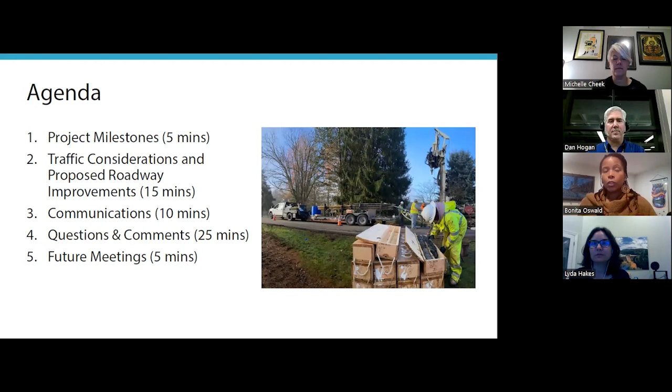Thanks, Bonita. Good evening, everyone, and Happy New Year. I think we could still say that for a couple more days anyways. I'll kick off tonight's meeting with some quick updates on the filtration project progress, and then turn it over to Dan and Lyda, and then back to Bonita.

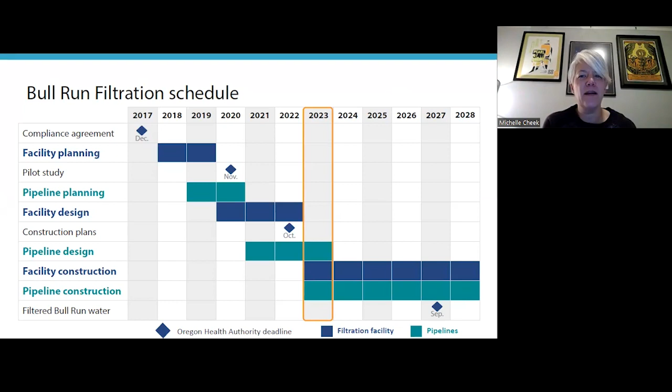Here we are in a new year, now a little less than 5 years away from our September 2027 deadline to deliver filtered Bull Run water.

2022 was an important year for the project and meeting some important milestones. In September of 2022, we submitted our land use application to Multnomah County and are working on the next steps with the county. I'll share further updates on the next slide.

In October of 2022, we submitted the filtration facility construction plans to the Oregon Health Authority, meeting our regulatory deadline to submit construction plans. We're now working on final design details, preparing the 100% design deliverable for the filtration facility and the 90% design deliverable for the pipelines portion of the project. Later this month, we'll be submitting our land use application to Clackamas County for the portions of the project located there.

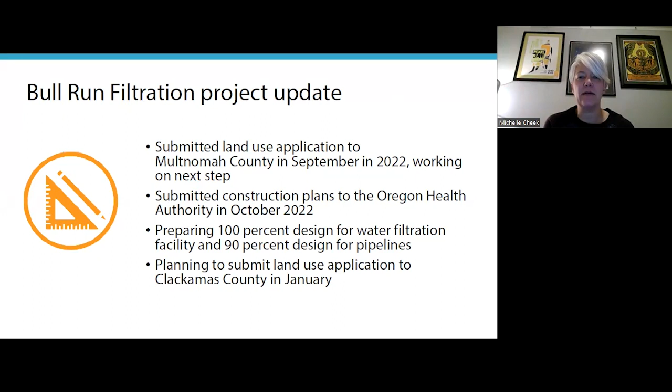As mentioned, we submitted our land use application to Multnomah County in September of 2022. The county deemed our initial application incomplete, which just means they need some additional information on a few topics. Our project team is preparing this additional information, and we're hoping to achieve completeness in February. Once the county deems the application complete, there will be a 150-day application review period.

Now that we're approaching the end of the design phase, we're doing more planning for facility construction. We're working with the contractor to develop an overall schedule and sequencing of work, with a planned construction start date of September of this year for the facility, and spring of 2024 for the pipelines.

Part of the construction planning includes identifying construction safety measures and other best practices to limit disruption to our site neighbors and surrounding community. Bonita will also be leading ongoing communication and outreach to our site neighbors and local businesses, which she'll talk about later in the presentation. We'll also be getting the contractors for the facility and the pipelines out to meet with our neighbors and surrounding community as we lead up to and during construction.

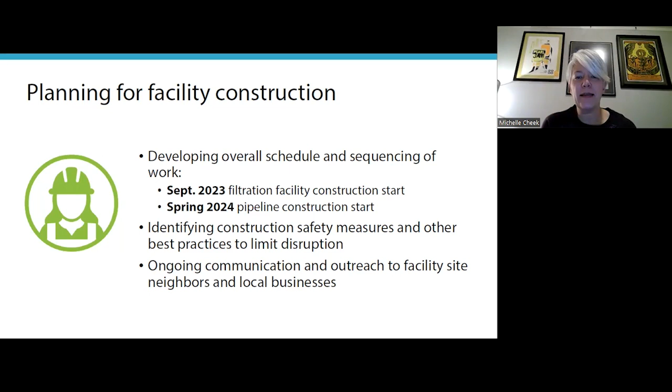And with that, I will turn it over to Dan to talk about some of the construction traffic considerations. Thanks, Michelle.

So this project has both pipelines and a filtration facility being constructed. The facility is near our existing pipelines, but not quite exactly in the right location. On the slide here, you can see the green line - that will be our unfiltered water going into the plant. The blue lines going out to the north and west are the filtered water.

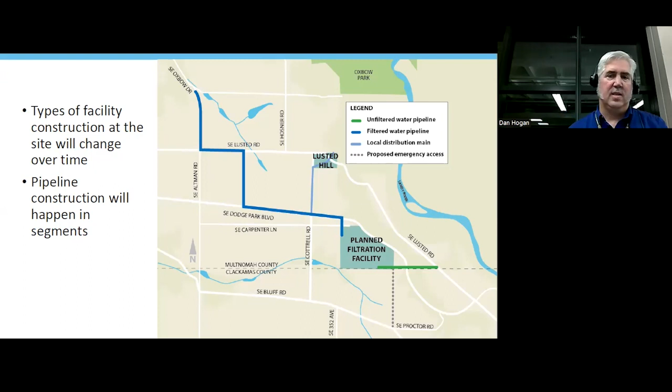Construction of the pipelines, as Michelle stated, will start in spring of '24 and goes through 2027. We're going to be working on a lot of roads, but the work will not be all simultaneous - it'll be more of a linear construction. This is kind of all our locations that we're working, which you can see here.

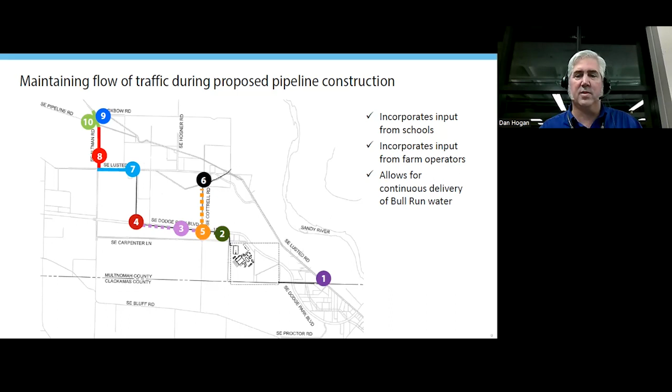When we are laying out our construction plan, we're going to try to maintain the flow of traffic as best as we can. We've been meeting with schools in the area and incorporated input from them. We've been talking with the farmers out there, all the nurseries, and we're going to put a lot of constraints on the project that won't allow the contractor to work in multiple locations at the same time. All this is going to occur while we still deliver Bull Run water to the city of Portland and all its wholesale customers.

That slide was a little busy, so we broke it down. At location 1, on Lusted Road near where Dodge Park meets, this is where we're meeting our existing 3 pipelines and entering some private property, then going up the hill to our facility. This is going to require intermittent road closures at this location that could be on the order of a few months at a time, occurring throughout the whole project.

The constraints we put on the contractor here are to make sure emergency vehicles and such can still get through, and to have traffic open at nighttime.

Locations 2, 3, and 4 are on Dodge Park Boulevard. This is our finished water pipe now as it comes out of the facility. We'll have single lane traffic in Dodge Park. The reason 2 and 3 are separated is the constraints vary a bit based on the nursery operations that'll be going on. Location 4 is where we leave Dodge Park into a farm field.

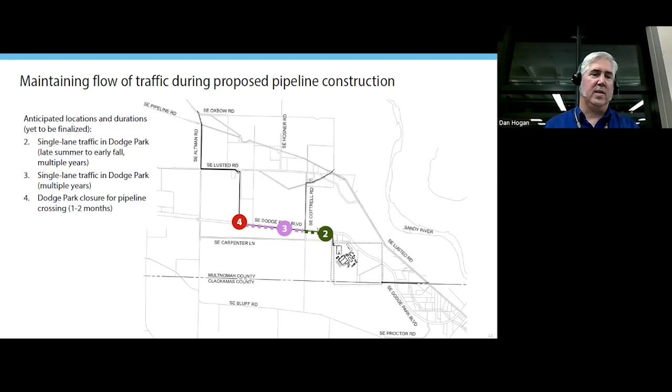At that location, we do need to cross Dodge Park, and there will be a semi-short closure of 1 to 2 months there, timed around farm operations.

This project requires us to connect back to what we call the Lusted Road distribution main that's down below on Lusted Road. So we're going to do that along Cottrell Road. Most of the work here is a trenchless installation, though there is some open cut, meaning we won't necessarily be digging up the road the whole way, but there will still be a lane taken, and we'll have single lane traffic while that work's going on.

Locations 7, 8, and 9 come out of what we call our finished water intertie. That's where the two new pipes coming out of the facility join up with the existing conduits along Lusted Road, which is very narrow, requiring a road closure there. This will occur in 2 different instances, one in the middle of the project and the other at the very end. Lusted currently has one of the conduits in it that we're tying into.

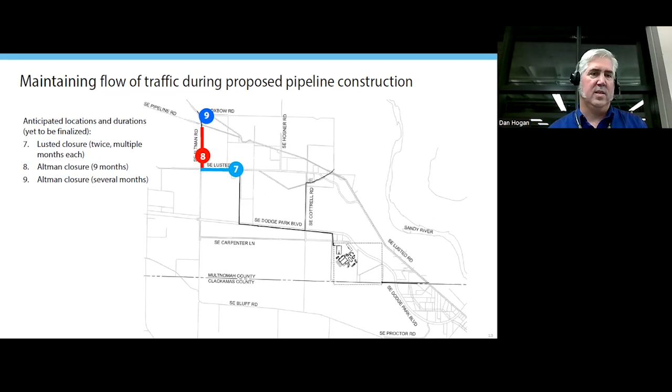On location 8, going up Altman Road, we're going up to meet the other 2 conduits at Pipeline and Oxbow. The reason 8 and 9 are separated is so traffic from Pipeline can either get to the north or the south depending on what part we're constructing. So 8 and 9 will not be at the same time.

At Pipeline Road, because it is a bit narrow, we do have to close that road down to tie into an existing conduit. Right now we're aiming at the summer for that one, to make sure school buses can get through in the school year.

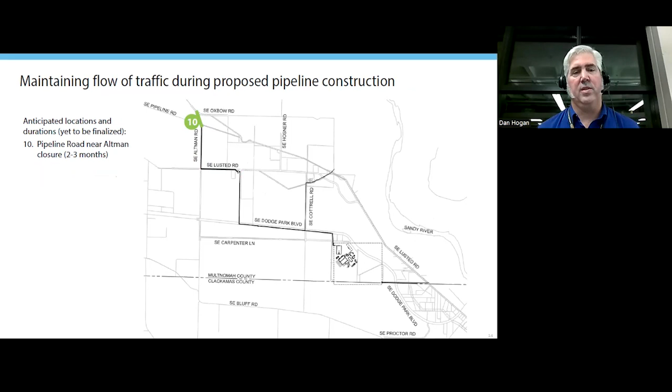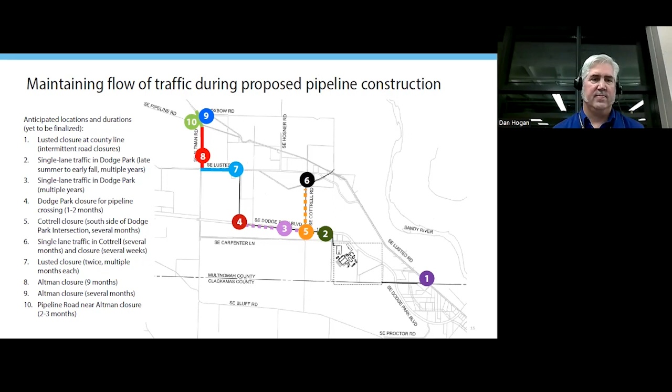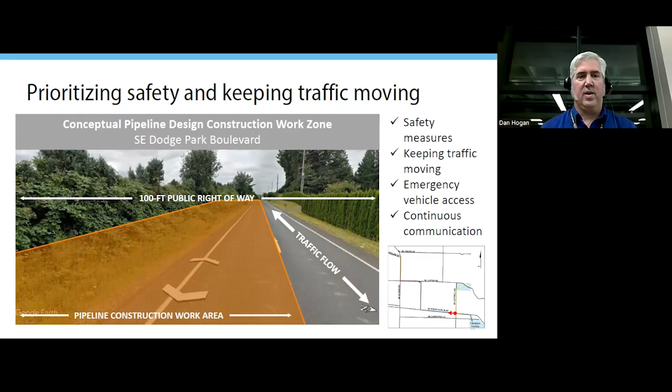We're going to prioritize safety and keeping traffic moving as we're doing this. This is a conceptual figure of work that would be going on Dodge Park Boulevard, which has a 100-foot right of way. On Dodge Park, we will always have one lane open to traffic, which will require flagging. We're taking into account safety measures, keeping traffic moving. Emergency access will be maintained throughout all the locations, and we're going to use continuous communication with the public to make sure things are safe.

This is an example of a work zone with traffic control measures. As 2 lanes come up to the work zone, it would go down to 1 lane as it goes through the work zone, then out the other side, with traffic going the other direction.

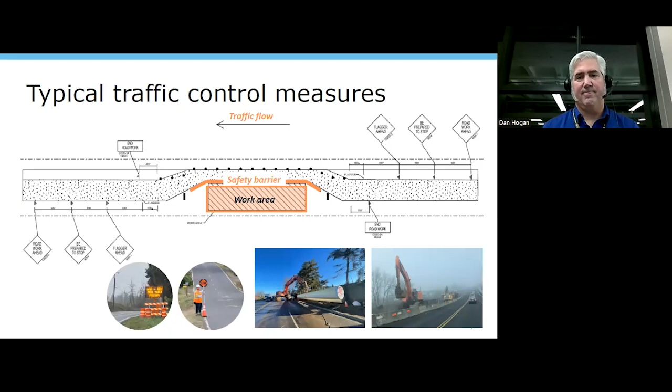One of our biggest focuses, and our contractors as well, is just to make sure that we have a safe and well-managed work zone. There'll be flagging at all times, with closures or single lane traffic. There'll be temporary offsite signage for traffic routes, and notifications sent out. We'll be using street sweeping and on-site dust control, posting safety signs. The equipment will be operated safely, and the contractor will exercise daily cleanups to make sure the site's safe at nighttime.

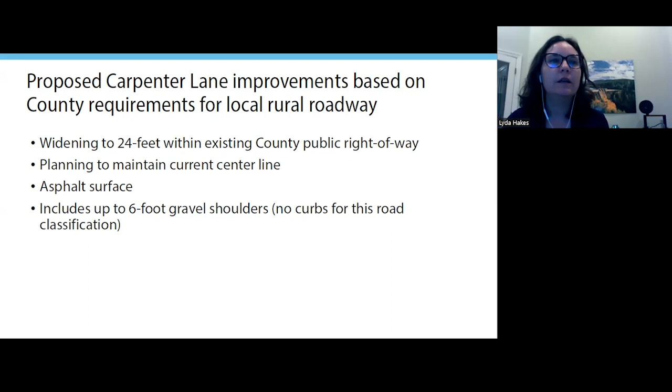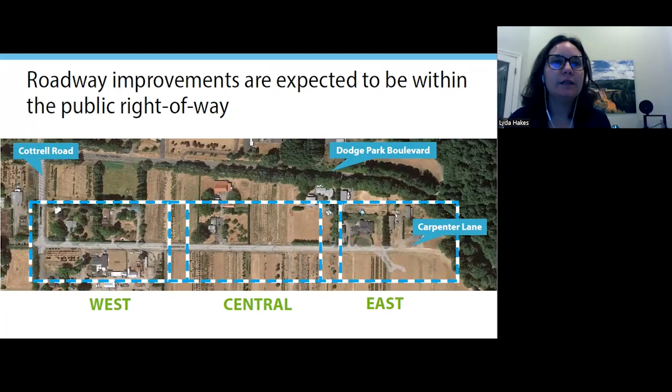The roadway improvements are expected to be within the public right-of-way. Here we've taken a Google Earth satellite image and overlaid our design onto it. To orient you, you have Dodge Park at the top, Cottrell Road on the left side of the screen, and then Carpenter Lane. We have it broken into 3 different sections: the west, the central, and the east. In the next slide, I'll walk through section by section.

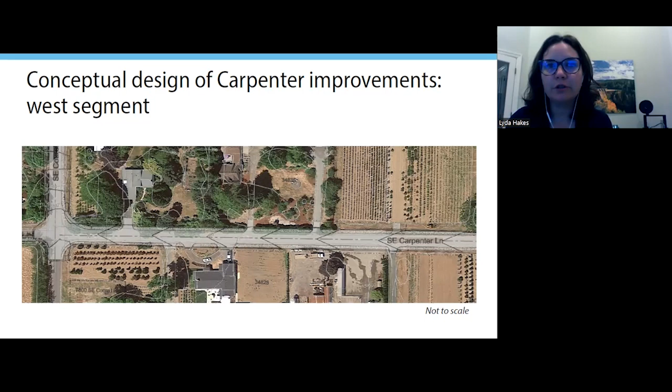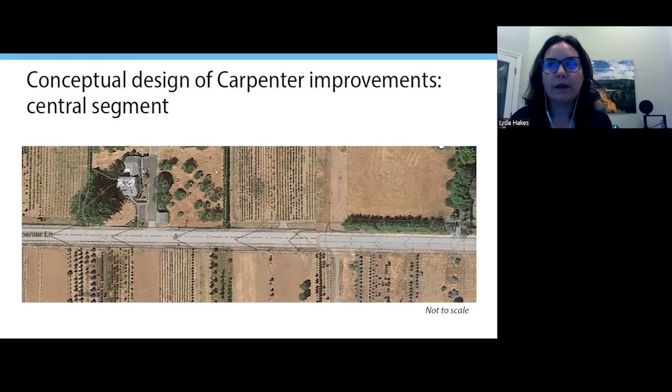On the next slide, we have the central section. Again, it looks very similar to the previous, 24 feet across with the 6-foot shoulders. The last section is the eastern section. At this point, this view shows the entry to our facility. We have an angular entrance right there, and then Carpenter Lane ends right at that last property.

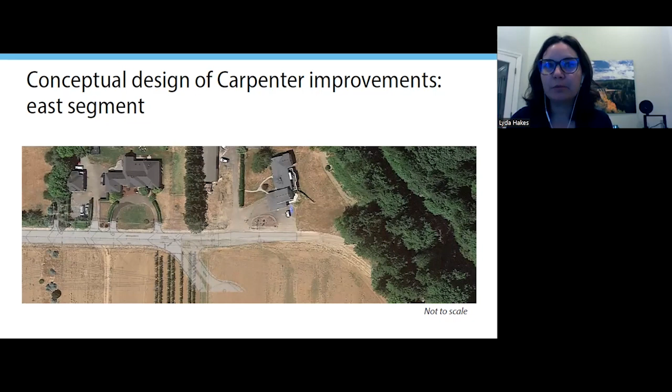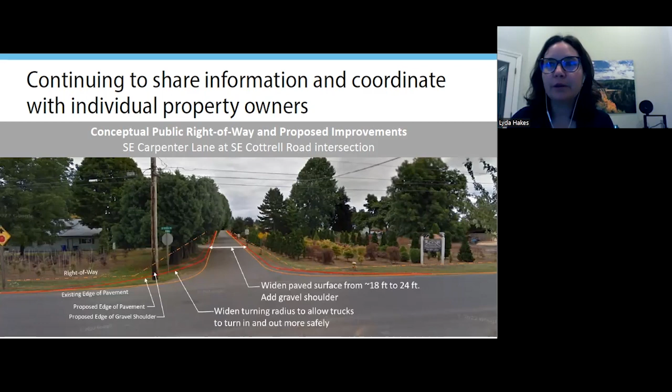On the next slide, this is another way to look at it, from a more person-height perspective looking down, again using Google imagery. Currently Carpenter Lane varies from about 18 to 20 feet across with 1 lane in each direction. Our proposed improvements are still 1 lane in each direction, but we would increase it to 24 feet across, so 12-foot lanes. We would also be adding the gravel shoulder. For this intersection, we want to ensure that the right-hand turn from Carpenter going north onto Cottrell can be done safely, so we're looking to widen the turning radius to allow trucks to turn out off of Carpenter Lane. This ends up with the existing edge of pavement moving, but still well within the public right of way.

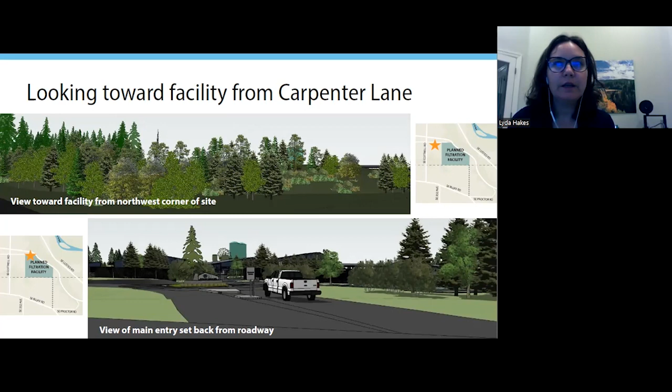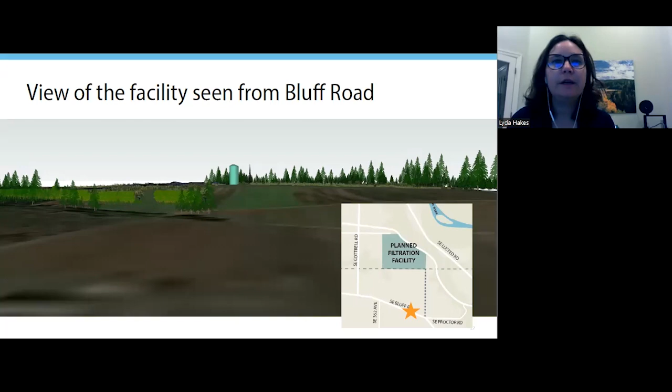If you are traveling on Bluff Road, traveling west, you can see there's a little slope naturally to the ground across the Surface Nursery property. And again, you see the Pleasant Home water tanks are the prominent feature. Our communications tower is shown in this view, and then to the left of the Pleasant Home tanks, you can see the roof lines of the facility, but again, they're pretty close to the ground level when you're looking out from Bluff Road.

So looking forward, the 3 main elements are design. We're coordinating with Multnomah County on road, intersection, and driveway standards. We are designing the roadway improvements to meet the county requirements, and all this work is within existing right-of-way. And we're continuing the design of our proposed emergency access, which is from the facility down to Bluff Road.

In terms of construction, Dan talked about some of the elements that are really critical in terms of sequencing and working with the community. So we're going to continue to work with the contractor on traffic controls, including provisions for local and emergency access during construction. And then Bonita will continue her efforts to communicate with property owners moving forward. Bonita, I think I can hand it over to you now.

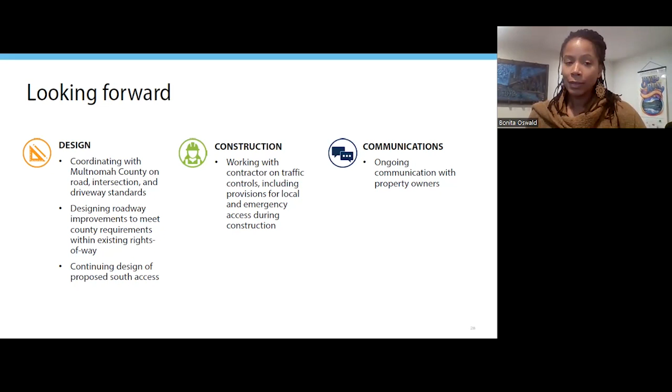All right, well then we'll move on to the next slide here. So as we get a better understanding of the conditions that the county might have, and any sort of more refined plans, we will start to meet with individual property owners along the project routes to discuss potential impacts.

Some of the construction, as construction ramps up, you might expect to see more of our emails and from e-news, and you might also see more of our website page being updated for construction.

Sorry, I'm just going to take a... okay, I will come back to that with the questions about Bluff Road. I see you there, Pat.

We also will continue to send postcards and mail about the project, but we will also be having more direct contact with you when there's activity on or in front of your property, depending on the level of impact. That might be meetings or phone calls or door hangers. We also will have reader boards, as we've had previously anytime that we've had a lane closure or a road closure. And we'll continue that, and also the signage, as Dan mentioned.

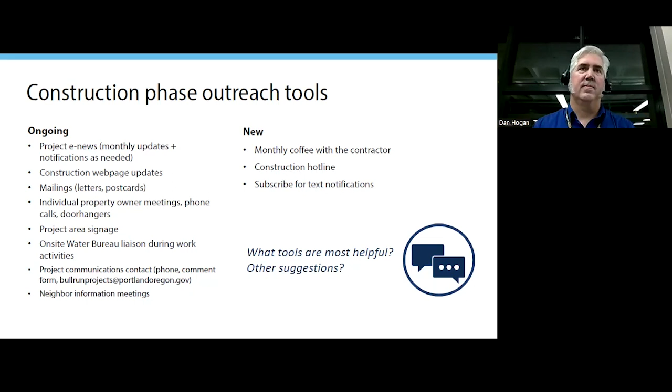Essentially, it's a trenchless installation. So from the facility's outlet where the finished water comes out, we're going to do a tunnel, essentially a trenchless installation of the pipelines under the property out to Dodge Park Boulevard. So we won't have any interruptions of Carpenter Lane from the residents or from the facility's construction traffic trying to get in and out. But we are going under that property, from Dodge Park back to the facility.

All right, thank you. Jennifer is asking, who is going to serve you for emergencies? Did you want to take that, Lyda?

Yeah, so we have reached out to local service providers. We've been working with Gresham Fire, Rural District 10. We've been working with Multnomah County Sheriff and Clackamas County Sheriff, so we are in communications with all of them. We've provided updates to those groups about our project and our progress to date. And what we refer to as will-serve letters have been submitted as part of our land use application for Multnomah County, and will be in the Clackamas County land use submittal.

Carol is asking, where are we on the Multnomah County land use process? Do you want to take that, Michelle?

As I mentioned earlier, we submitted our land use application to Multnomah County in September of 2022. There's a completeness review process the county does, and the county has deemed our application incomplete because they're looking for some additional pieces of information, which we're working with our team to provide back to them. Once we get that information back, they'll do another completeness review, and we're hoping to have our application deemed complete in February.

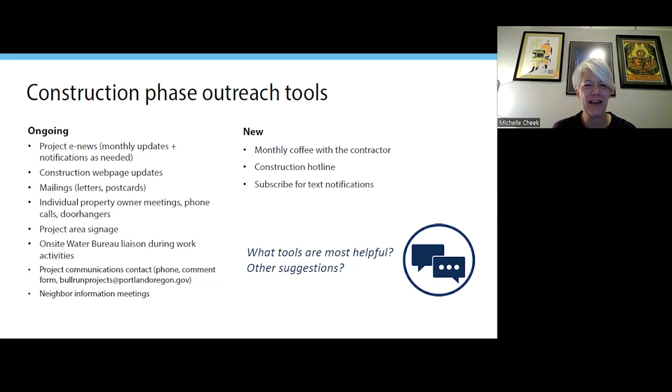Carol asks, are you planning to use local subcontractors? Anybody want to take that? I know you all are aware - yes, I can take that one, Bonita. Yes, we are planning to use local subcontractors, and the contractors for both projects will be putting different portions of the project out to bid in the local contracting community.

Jennifer asks, I noticed in the OPB article on January 4th, the stated cost was 1 billion. Where is the disconnect between the writer and PWB? Is that not misleading to ratepayers? Unfortunately, we cannot control what gets printed. We send corrections and they choose whether they are going to update it or not.

Patricia asked, do you only receive 50% of the project costs? I'm not sure - do we only receive 50% of the project costs in terms of the WIFIA loan? Elaborate - the loan. Yeah, 49% of the project costs are eligible for reimbursement from WIFIA, and the remainder of the cost would be funded through Water Bureau rates.

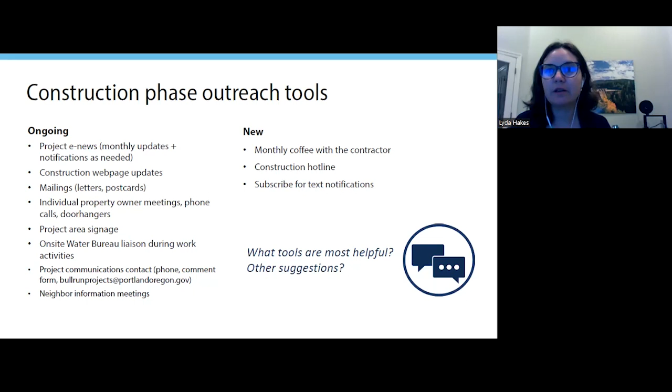Natalie says: these decisions were made by Portland City Council, who bears no adverse effects to their community other than the astronomical water rate increase heading their way. Wouldn't it be fair and transparent to notify local governments on transportation plans? We can all look at maps and figure out East County roads will be detrimentally impacted.

Well, we actually have trucks going through this area and many of these roads already, taking different chemicals to the Lusted Hill facility and also through to our watershed. I'm sure there are a lot of other companies and agencies doing the same, but we don't necessarily have to notify anyone about that. It's just the way our community works. But we do our best to make sure that our transportation is safe, and what we can do.

And does anybody else want to add anything to those concerns? All right, Carol asks—oh, go ahead, Michelle. I was just going to say I think you covered it well. Thank you, Bonita.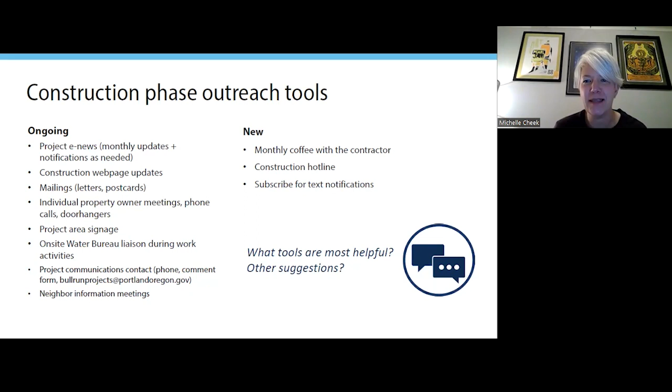All right, thanks, Michelle. We're running up to about 2 minutes left in our time here today. If anybody has any other questions or comments.

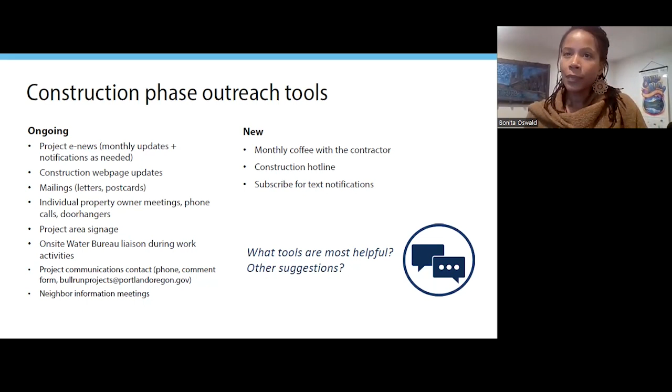Jennifer says, this belongs in the city where it serves. City council ruined Portland. It's easy to spend other people's money when you have no skin in the game. I appreciate the comment and take note of that.